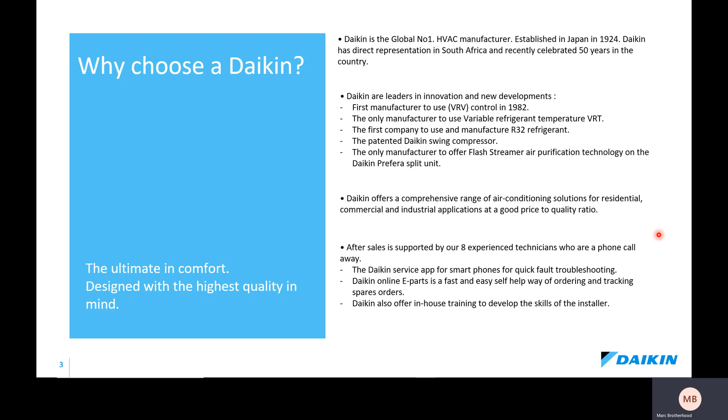Daikin also offers a comprehensive range of air conditioning solutions for residential, commercial, and industrial application at a good price to quality ratio. After sales support is provided by our 8 experienced technicians who are a phone call away. The service app for Daikin is available on smartphones for quick fault finding and troubleshooting, available for Android as well as Apple. Daikin also offers online e-parts as a fast and easy self-help way of ordering and tracking spares and orders. Daikin also offers in-house training to develop the skills of our installers.

Let's take a look at the R32 refrigerant. As mentioned, Daikin was the first company in the world to launch heat pumps and air conditioners equipped with R32 refrigerant. The global warming potential, or GWP, of R32 is only 675, which is only 1/3 of the commonly used R410A refrigerant. R32 is also easy to recover and reuse. So in a nutshell, R32 is a single blended refrigerant, very similar to R22. It's a derivative of R410, which was made of R125 and R32.

So R32 is an ideal refrigerant in the event of any leaks. You can just top up directly. There's no losing of the blends, so you're not going to have either extra R125 or R32 within the solution. So for thermodynamic efficiencies, R32 is a great choice of refrigerant.

675 is the global warming potential of R32. R410 has a global warming potential of around 2088. What that pretty much means is if I lose 1 kilogram of R32, it's equivalent in atmospheric conditions to emitting 675 kilograms of carbon. With R410, losing 1 kilogram of refrigerant out of a system would be equivalent to 2088, or just over 2 tons, of carbon going up into atmospheric conditions. So R32 is 1/3 of the global warming potential in the event of a leak. From an environmental point of view, it is the obvious and prudent choice to make.

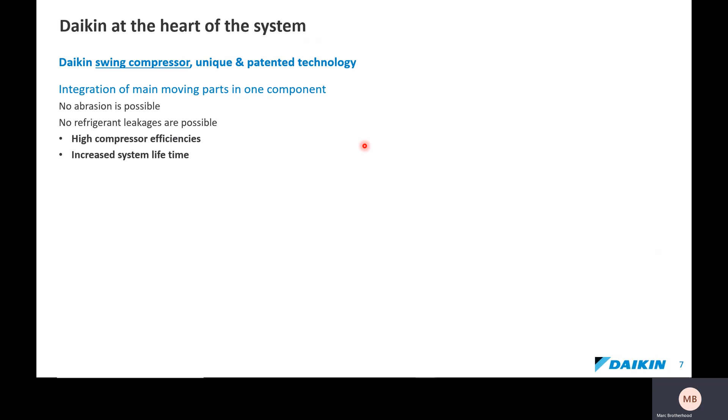What is also unique about a Daikin? If we look at the Daikin patented compressor, at the heart of the system is the Daikin swing compressor. It's unique and has patented technologies. The integration of moving parts is pretty much all in a monocoque design, or in one component, so there's no abrasion possible and also no refrigerant leaks within the compression cycle. Therefore we offer very high compressor efficiencies and an increased lifetime of this compressor. We're the only manufacturer that manufactures this compression device in one single casting.

The good thing with these high compressor efficiencies is you don't get any leakage, because of this monocoque design you won't get any leakage on the high and low side when we do any compression. If we look at the other compressors in the market, these are standard, non-Daikin.

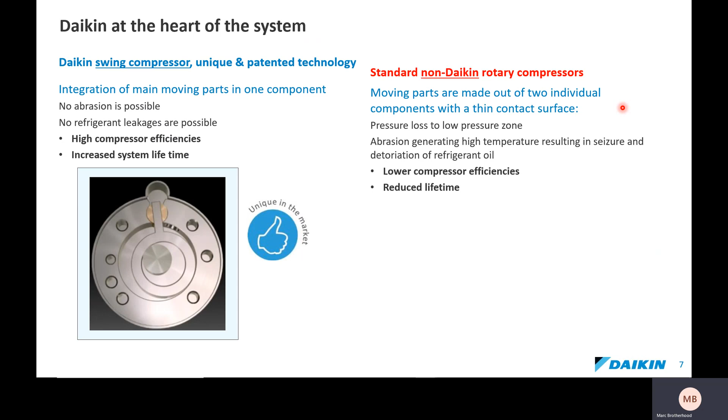These are called rotary compressors. The moving parts are made out of two identical, two individual components with a very thin contact surface. Ultimately you're going to get a lot of pressure loss in the low pressure zone, with high side pressure feeding back into the low pressure side. You're also going to get a lot of abrasion, which is going to generate high temperatures, resulting in possible seizures, deterioration of refrigerant oil and wear metals within the oil.

If you look at the Daikin design, you see this is a solid piece, the same material, whereas here these are two discontinuous pieces of material, and this is where your leakage is going to take place. Within this little geometric triangular design, you're going to get a lot of high pressure gas seeping through under this very small contact surface. There's going to be wear metals because of these two dissimilar metals, and here you can see buildup of wear metals within the compressor. This ultimately ends up in the bearings, mixed with the oil, and acts as a grinding paste, deteriorating your rolling elements within the compressor.

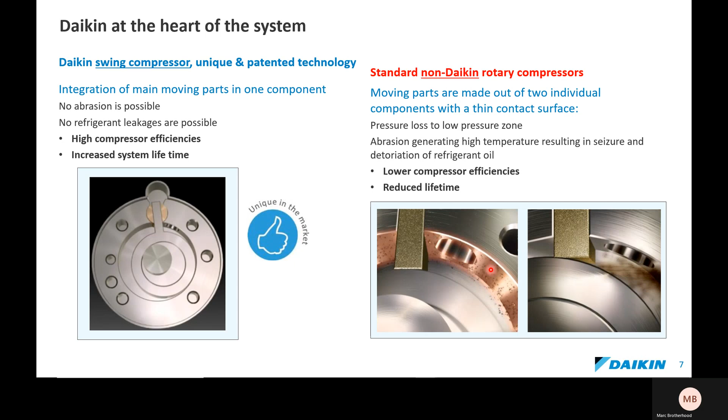Let's look at the Daikin corrosion protection, the Daikin salt spray test on what we call the bluefin treated outdoor unit coils.

We all know that energy efficiency and reliability are key aspects when it comes to choosing an air conditioner. However, the geographic location can be equally an important aspect. Corrosion is a very common cause of failure in air conditioners installed in potentially corrosive outdoor environments.

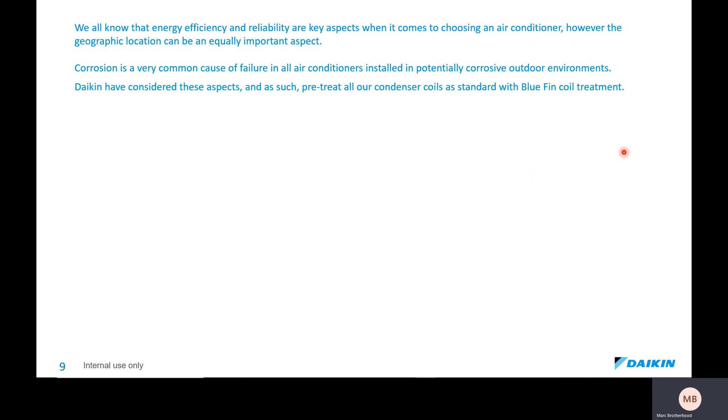Daikin have considered these aspects, and as such, we pre-treat all our condenser coils with what we call a bluefin coil treatment. To test the effectiveness of this treatment, Daikin employed the services of TUV in Singapore to perform very rigorous salt spray testing on our test samples.

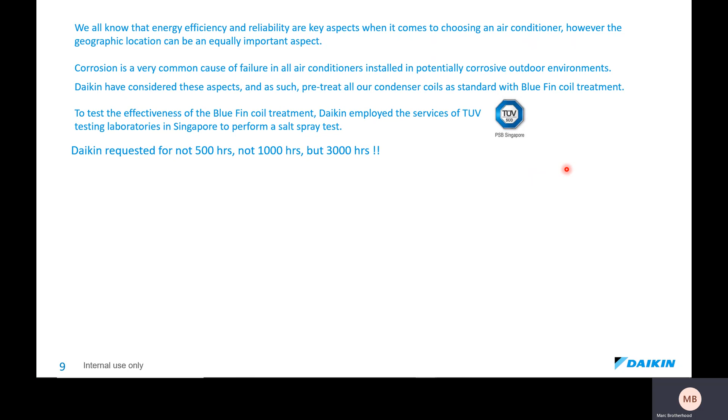Conventionally 500 hours is required, but Daikin requested not 500 nor 1,000, but 3,000 hours of testing in the salt test chamber. Here we can see the exposed period, part of the report from the laboratory, along with the test report number as evidence. And this was the sample of treated coil that Daikin supplied to the laboratory.

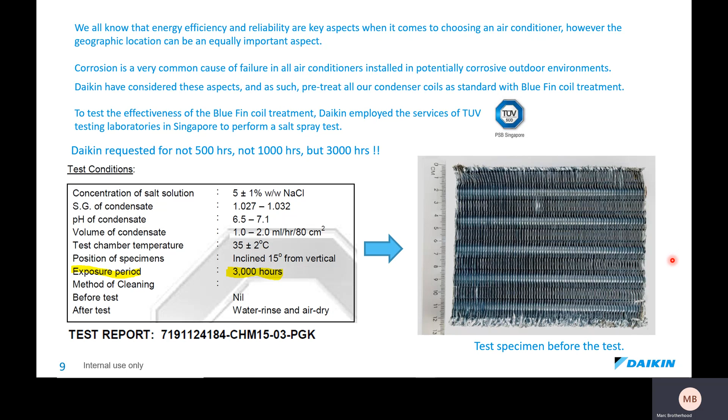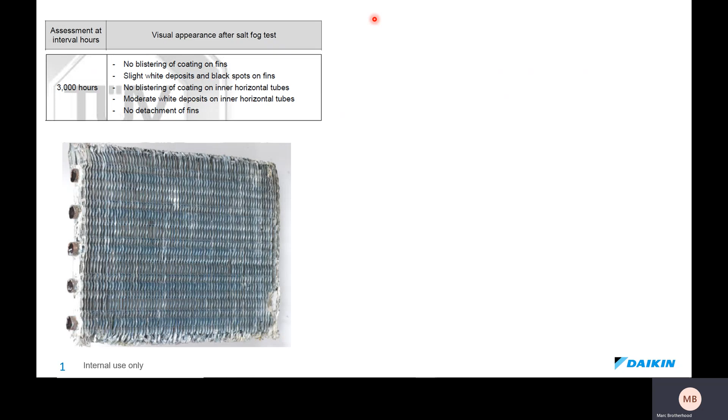If we look at the assessment in the report after 3,000 hours, we'll see there was no blistering of coating on the fins. There was very slight white deposits and black spots on fins. There was no blistering of the coating on any of the horizontal tubes, with moderate white deposits on the inner tubes, and there was no detachment of the fins from the actual tubes.

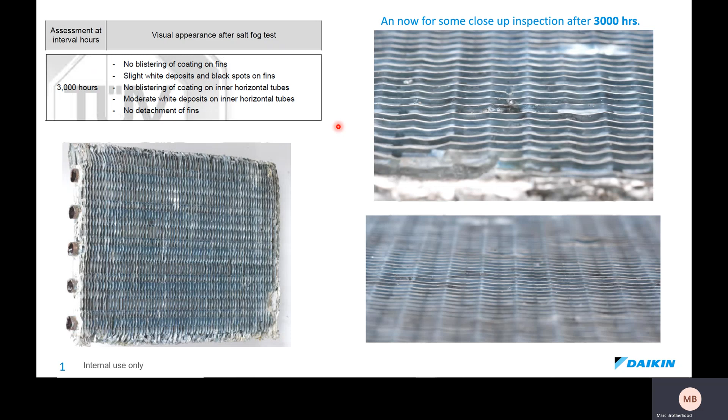That's very important. If you have detachment of the fins from the tubes, there goes your thermodynamic process, and you're going to battle to reach condensing temperatures, which ultimately affects the whole system. High condensing temperatures mean high suction superheats, and ultimately you're not going to achieve your cooling, and you're going to end up seizing your compressors. So there's no delamination of the fins against the tubes.

Next, a very important consideration to make when purchasing an air conditioner is what power surge protection the unit has, especially in South African conditions. Technically there are two enemies of electronic circuit boards.

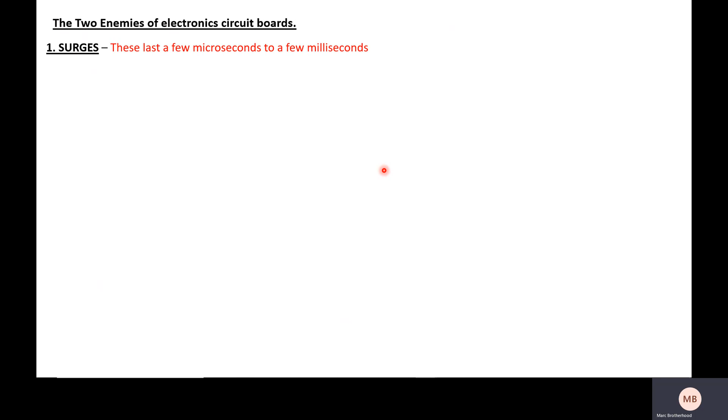The one is surges. These last a few microseconds to a few milliseconds. So what are surges? Surges occur in alternating current power lines as a result of nearby electrical equipment being switched off. For example, you could have a factory with a whole lot of motors, huge induction motors switching off. They will have collapsing magnetic fields, and these magnetic fields have nowhere to go but back into the supply cable, through the transformer, and back into the power grid.

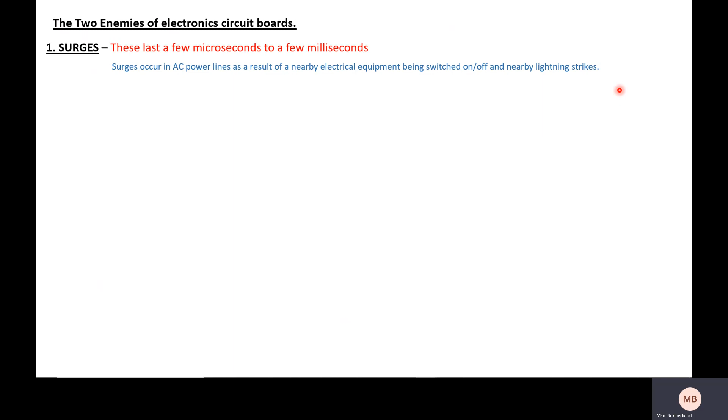And you can also get a surge through nearby lightning strikes. Here we can see a typical cause of transient surges. Here we can see an indirect lightning strike, cloud to cloud discharge.

When you get such a high discharge of static power, around this bolt there are huge invisible magnetic fields. These magnetic fields then enter overhead power lines, as well as any underground power lines. There's a lot of cables that are laid underground, but this magnetic field is permeable. It permeates right through space as well as soil. And what does it do? It generates a transient spark.

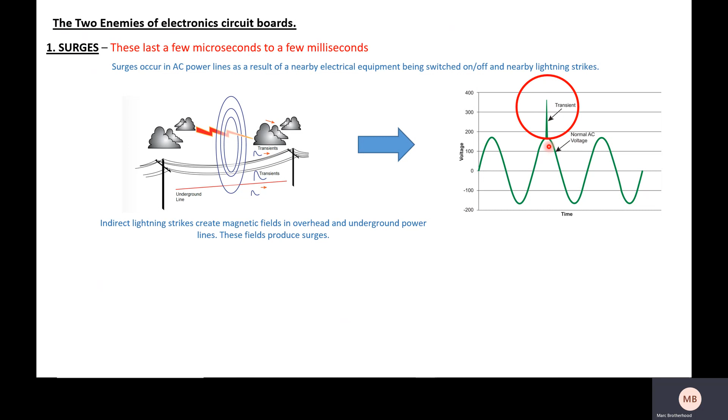This illustrates possibly up to 400 volts on a 230 volt supply, but these can go up into a few thousand volts. This cycle typically oscillates in 1 second. You have up to 50 hertz, so 50 cycles. Typically one of these cycles oscillates at 0.02 seconds, so it's 50ths of a second. And just on one of these sparks, or one of these 50ths of a second, you're going to get a transient spark, which can enter your electronics.

The next enemy of electronic circuit boards is temporary overvoltage. Overvoltage typically lasts for a longer period of time, from seconds to up until a few minutes. Remember, surges are microseconds, which is a millionth of a second, to thousandth of a second. Overvoltage can run from seconds to even minutes.

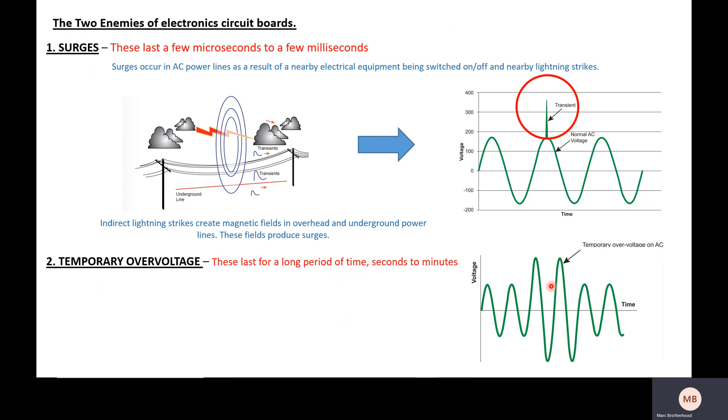Here we can typically see what an overvoltage is. It's a swell in the supply voltage. It's not as instantaneous as a transient spark.

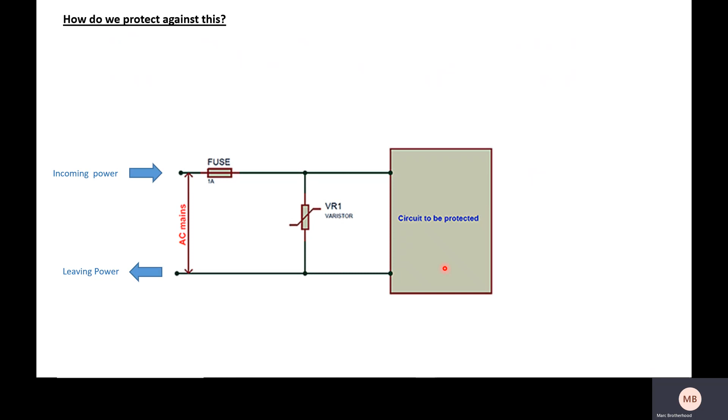So how does Daikin protect against this? Here we can see a typical circuit board on an air conditioning unit. We have the incoming power. It enters through the cable, does useful work through the electronics, and the frequency returns back to the transformer in the road.

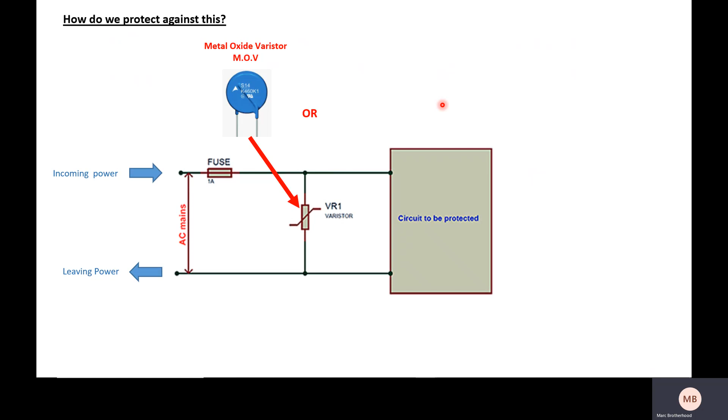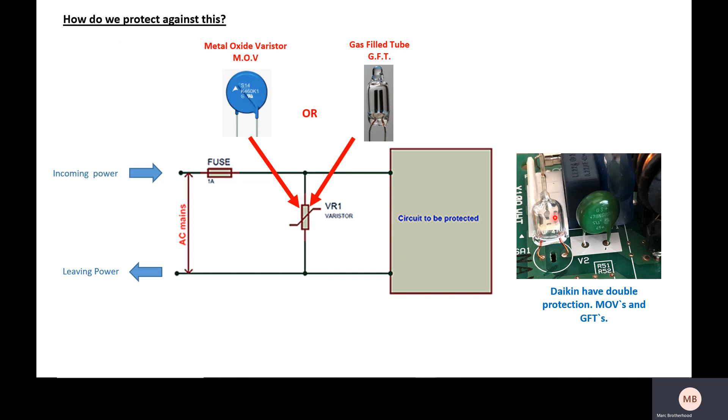So, all good and well, but to the layman, how does a metal oxide varistor work? We go back to our circuit, and here you would see the metal oxide varistor in circuit.

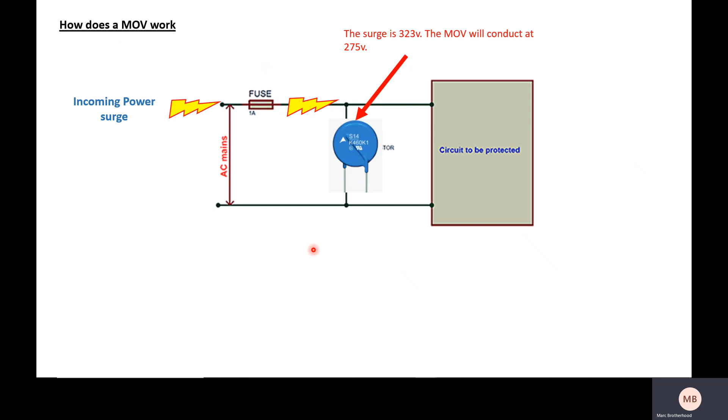Now we would have an incoming power surge. It would enter, it would go through our fuse. It wouldn't last long enough to blow the fuse because it happens so quick. But let's say the surge is at, say, 323 volts, or if we look at this specific component, it can handle up to 460 volts.

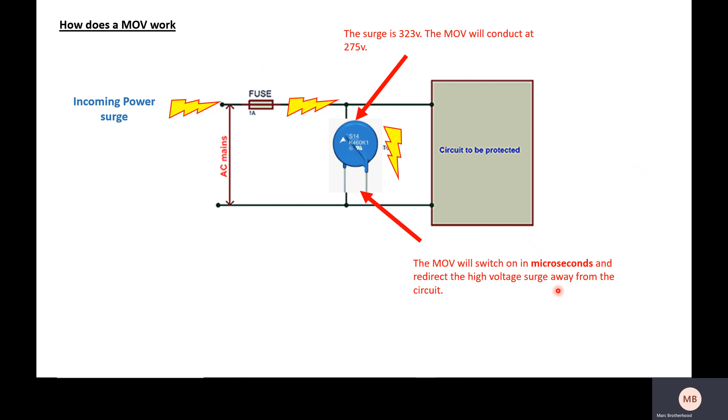When you reach these high voltages, the MOV will pretty much start conducting anything over 275 volts. It'll immediately switch on in microseconds, and it's going to redirect the high voltage surge away from the circuit, and send that energy back into the AC power lines where it came from. Therefore, it's going to go through this fast acting device and back into the grid where it's come from. And none of the energy is going to be transferred.

And these, believe it or not, these things work regularly every day, all day. You just don't even know that they're working. With time, if you eventually open these up, you will see they'll be slightly discolored, like a brownie tinge to them, and some of them might develop cracks on the surface. That is because they've been working all along in the circuit without you even knowing it.

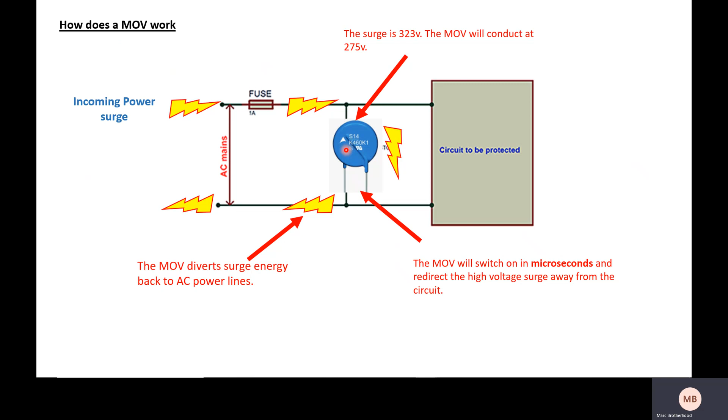The reason they go brown and discolor and split is because of the heat. There's different spikes that continually come in during the day, and these things get hotter and hotter, and with time, with thermodynamic stressing, they all split and crack.

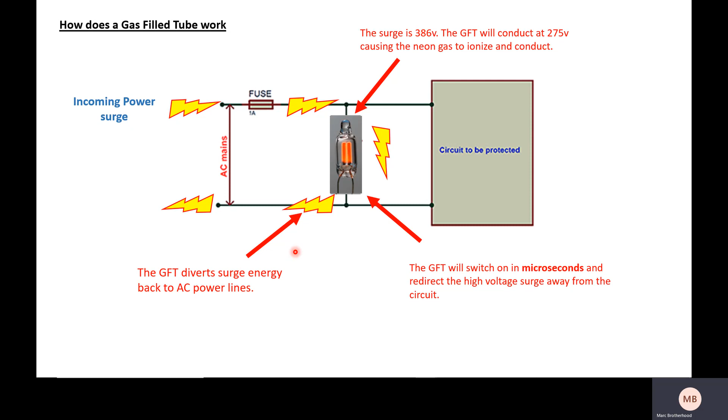The neon inside will become electrically conductive, like you would see in your neon signs. And bang, the gas-filled tube within microseconds is going to redirect the high voltage surge away and send it back to the Eskom power lines.

So now that we know that the units pretty much all come with unique Daikin patented swing compressors, all our units come with Daikin bluefin coil treatment for corrosion. And thirdly, the units all have double surge and overvoltage protection in the form of metal oxide varistors and gas-filled tubes. Let's look a bit more specifically at our product ranges.

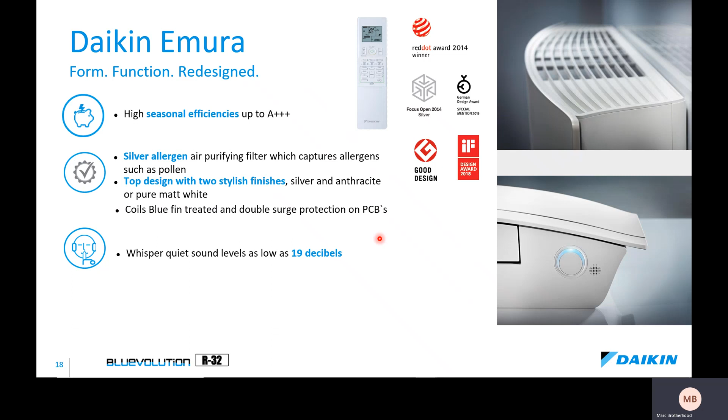The coils are bluefin treated and, as mentioned, will come with double surge protection on the circuit boards. It's whisper quiet down to 19 decibels. So just for you to picture how much is 19 decibels, if you just lean over and whisper very, very quietly in somebody's ear, that registers as around 30 decibels. So this is way, way quieter than even whispering quietly in somebody's ear. The unit also has online controller capability, which you can operate through your smartphone by downloading the application from the Daikin website or your app store.

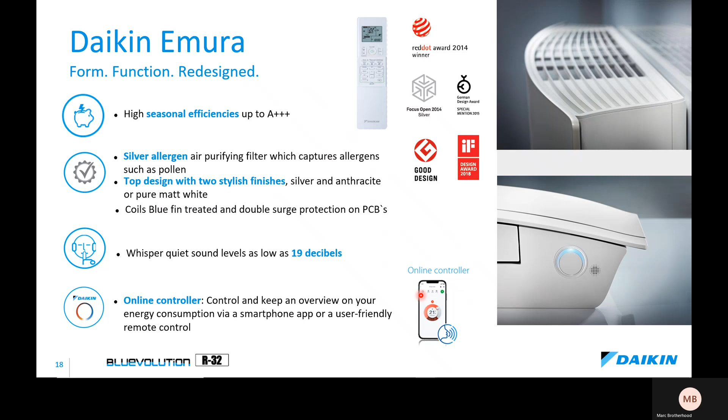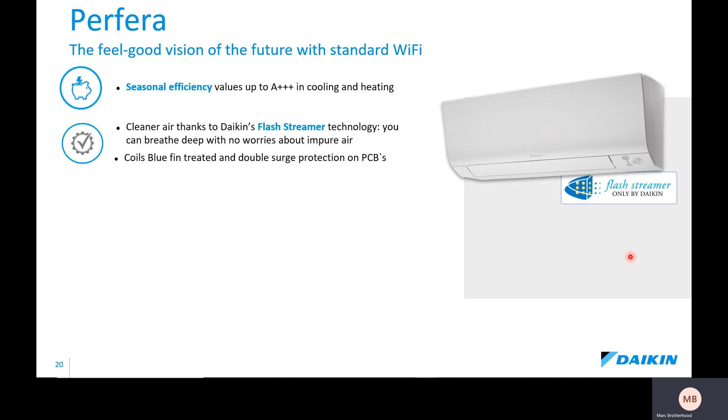The next model we offer is the Perfera. So very good seasonal efficiencies, up to A+++ in heating as well as cooling mode. Very unique, this is cleaner air thanks to Daikin's flash streamer technology. You can breathe deep with no worries now about impure air. This is the only unit on the market that uses flash streamer technology. Also, bluefin coated coils, double surge protection on the circuit boards.

This unit also comes with a 3D airflow, which are these sensors here. The one is a 2-area motion detector sensor. So if airflow would be sent to another zone within the area, so you don't get drafts on you. And the other one is an energy saving mode. It uses infrared technology. If it senses there's no human presence, it will default to an energy efficient setting.

The scroll compressor will drop right down to minimum rotational speed. When you walk back in the room, the infrared sensor will detect your body and go back to your default setting of whatever your settings were prior to it going into energy efficiency mode.

Also practically inaudible, so ideal for bedrooms, nighttime, where sleeping and noise sensitivity matters to certain people. Very, very quiet, virtually whisper quiet. And this unit will also offer the online controller.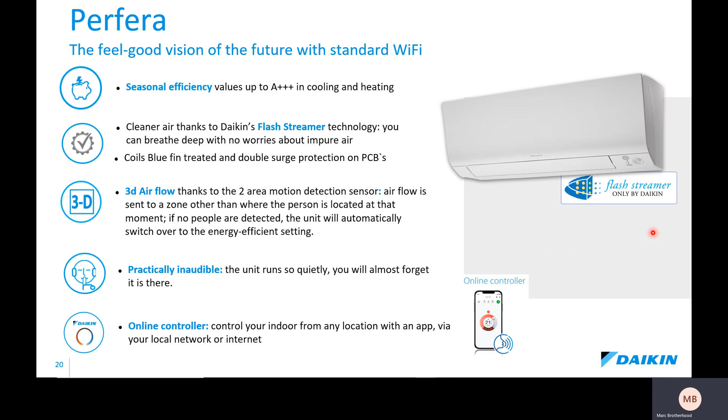So let's have a closer look at the flash streamer. How does it work? It generates high-speed electrons. This streamer has a high potential difference, which accelerates and puts a lot of kinetic energy into electrons. These are ionizing electrons, and they eventually collide and activate any molecules that are going across

the filter and across the coil. And what it does, it powerfully decomposes any dust mites, pollen particles, mold, viruses, with the kinetic energy carried within the electrons. If you open the cover of the unit, these are the 2 titanium apatite and silver allergen filters, and the flash streamer is actually housed in this white box.

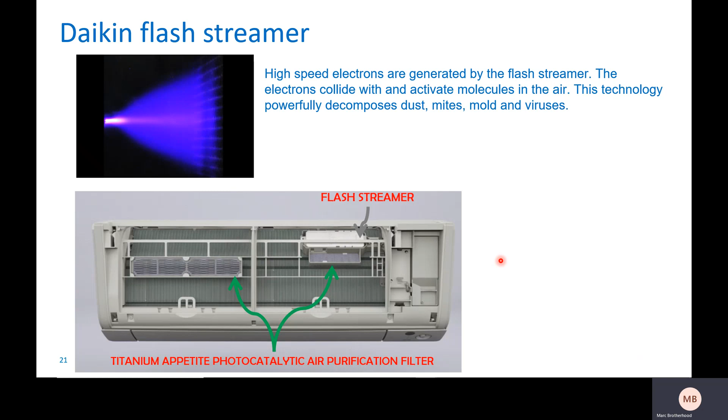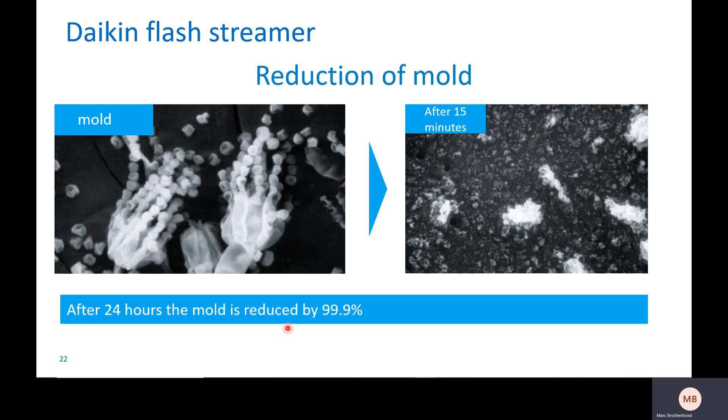Look at what this flash streamer does. Typical mold that would come across the coil. After 15 minutes, the high-speed electrons detonate the molecular structure of mold. And after 24 hours in a closed room environment, you can reduce the mold by almost 100%.

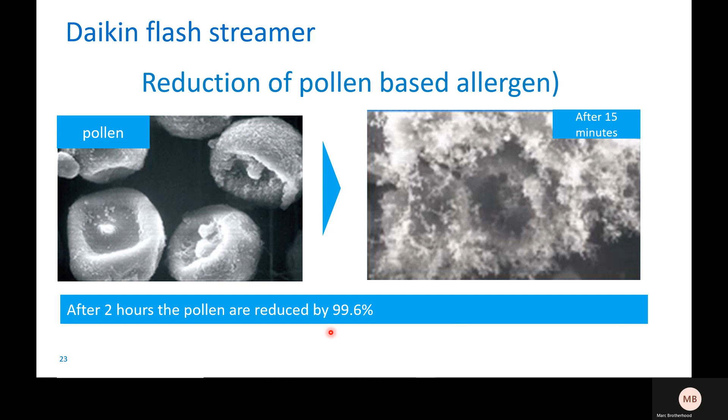Pollen - people that are allergic and have reactions, especially around springtime, typical pollen molecules in the air creating sinus allergies. After 15 minutes, the pollen particles are totally disintegrated. In a closed room, after only 2 hours we've virtually eliminated all pollen in a typical room, so it's much quicker than the mold virus. Within 2 hours, your allergens should clear up.

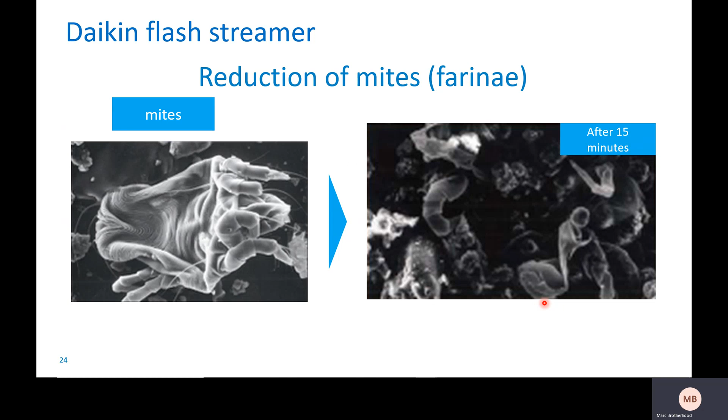And dust mites, notorious - they live on your skin, they live on any forms of dust, they float through the air, they're much less buoyant than air. After 15 minutes of being hit with high-speed electrons, you can see that their bodies are totally disintegrated.

The third product on our room air conditioning range is the Daikin Sensira. This unit comes with a Daikin online controller app, and you can also have voice command via Amazon Alexa or Google Assistant. With this, though, you would require this Wi-Fi interface adapter as an optional extra. There's a cavity within this unit, and the Wi-Fi adapter will slide into this cavity and will give you Wi-Fi and voice - just by talking to your mobile phone, you can control this air conditioner.

Not as energy efficient as the Emura and the Perfera, but also very good value return. In return, A double plus in cooling mode of energy efficiency.

We offer long pipe runs too, 20 meters on the 9,000 and 12,000 BTUs, with a height difference of 12 meters - so you can typically go around 4 stories. With these units, there's enough energy in the compressors to carry back any oil. And in our 50 and 60, or 5 and 6 kilowatt class, we can go 30 meters and up to 20 meter height difference, which is about 6 stories with these units.

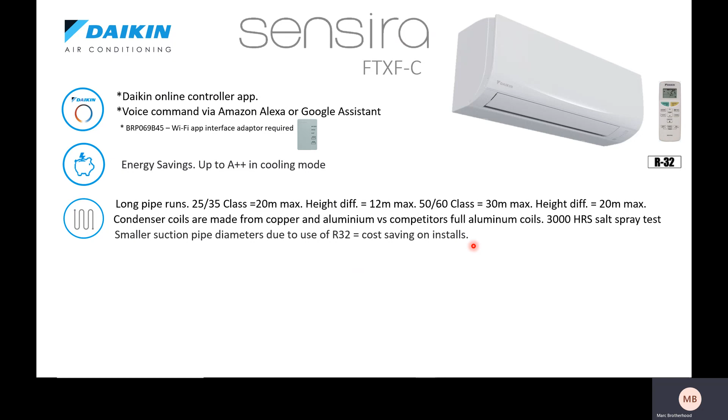PCB protection as well, also has the metal oxide as well as gas-filled tubes. And it has the new swing compressor, which is very good in reducing any breakdowns because of the longevity of the monocoque design of the swinging mechanism.

These units also go down on the 9,000 to 21 dBs, and as mentioned, the whisper is around 30 dBs, so practically inaudible in cooling mode when you're trying to have a quiet night's sleep.

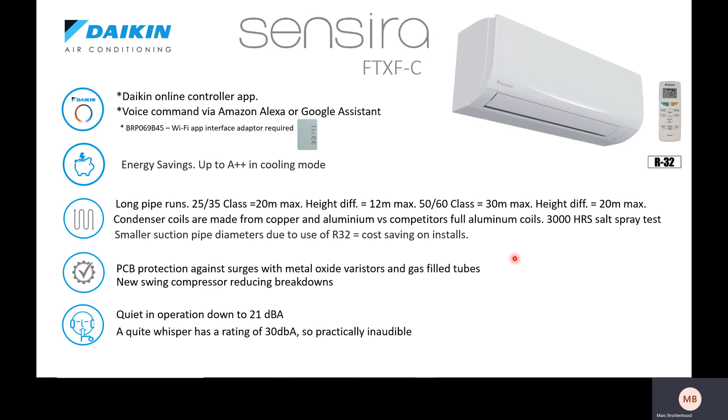We've done a running comparison of the units, the Sensira, the Perfera, and the Emura. If we take, for example, electricity charged at R1.88, and use a seasonal energy efficiency value taken over a seasonal year, here we can see the operating costs of running one of these. This would be a 12,000 BTU unit, they're all 3.5 kilowatts, and it will cost you around R1 an hour.

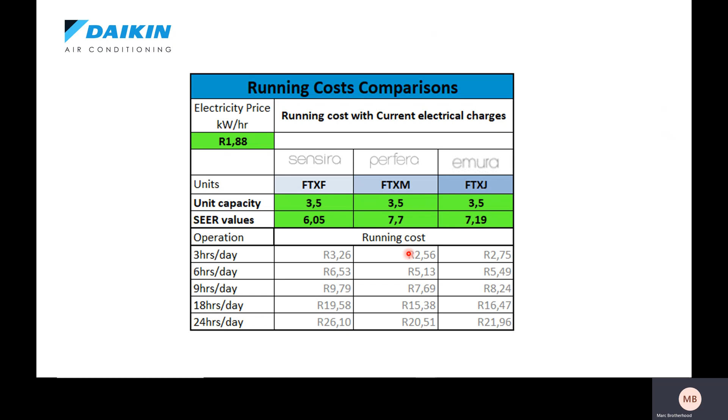The Perfera being in the middle, around R2.56 running for 3 hours. So they're very energy efficient to run, these units.

That concludes the operations, or the introduction to our room air conditioning range. We now go on to our more commercial and light commercial ranges, which we call the Sky Air range.

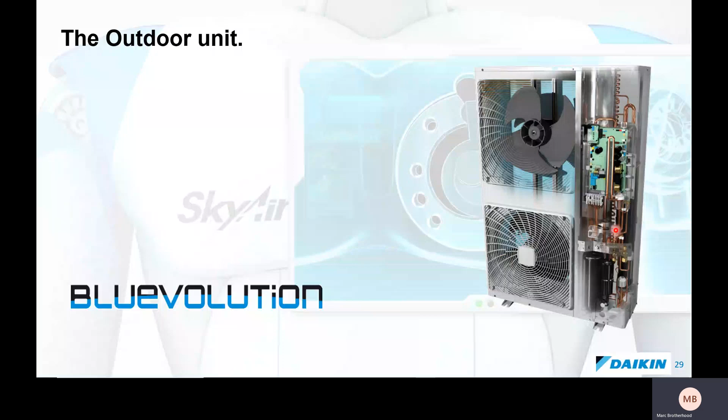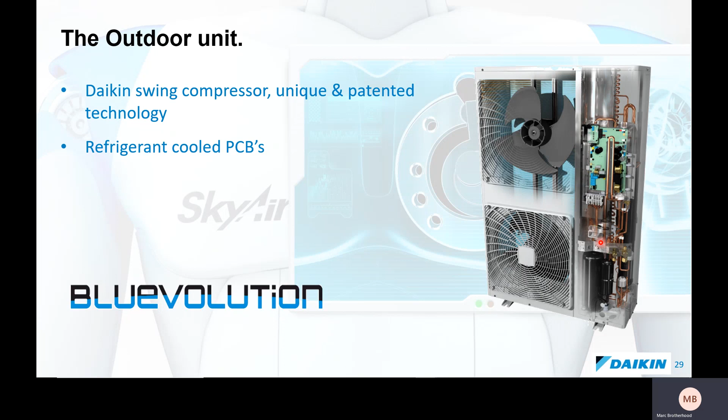Right, let's take a look at the Daikin outdoor units on our Sky Air ranges. They come with a Daikin swing compressor, which is unique and patented technology specific to Daikin. Very unique to our product is refrigerant-cooled circuit boards, double surge protection, and all come charged with R32 refrigerant.

If you look at this unit, we've taken the covers off for you. Here you can see on the circuit board is a refrigerant pipe. This refrigerant pipe is bolted onto an aluminium heatsink.

In the event of load shedding, in the past, normal aircon units out in the field require forced draft induction, so these fans need to spin even when the refrigeration circuit is off. The reason these fans need to spin is to draw air over the power electronics and keep them cooled. If you have load shedding, these fans just stop automatically and you get a big buildup of thermal energy with nowhere to go. You ultimately dry out the heat conducting paste on your IGBT modules, and the heat conducting paste eventually goes hard and brittle, and you end up with component failure.

Now, with load shedding, even if these fans stop, there is still refrigerant under high pressure in this pipe, and due to natural conduction processes, the heat will come through. Generally, these components can be up to 80 degrees. This subcooled liquid in here is sitting at around 45 degrees. So you're still going to get around a 40-degree difference on these electronic components.

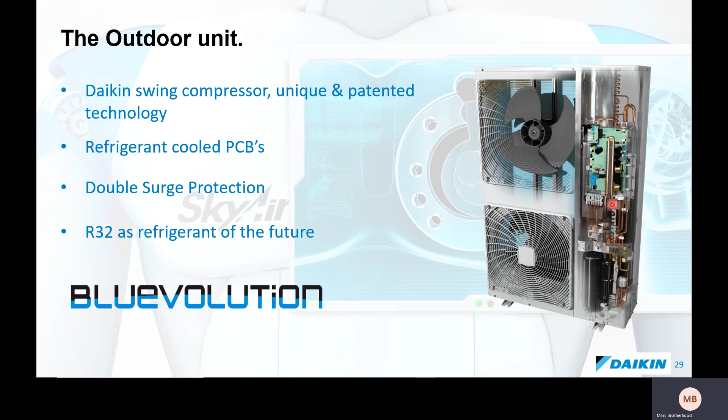They're going to pretty much just cause this refrigerant to boil within the pipes. As it boils, expanding gases cool, and the expansion is going to go into your field pipe work, therefore keeping your electronics nice and cool, regardless of whether these fans are cooling or not. So it's very good longevity that Daikin have introduced to keep our electronic components cool and operable within around the 80 to 85 degree operational range that they can get to.

Well, first of all, very good energy savings, up to A++ in cooling mode. We offer the optional motion sensors, which can further save up to 27% on energy bills. Here we can see the presence sensor and the floor sensor, where they make judgments, and it will go into standby mode if it doesn't sense you through that sensor, and the floor sensor pretty much removes any drafts from blowing on you.

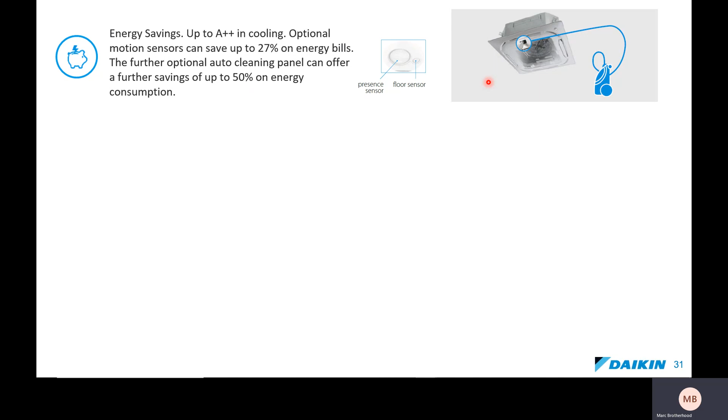We also offer a further 50% saving on energy consumption with the auto cleaning panel, and here you can see all you do is plug in your vacuum cleaner into a little dust box. A little light will come on your remote control telling you the dust box is full, and all you do is plug in this vacuum cleaner and empty the dust box.

There are two series that we offer: one is called the Daikin Advanced series, and the other is the Active series. There is a price difference between the two, but if we look at the pipe runs on the 35 class, it's 20 meters, and we can do a vertical distance of 15. Pretty much we can go up to 50 meters on the Advanced series, a 30 meter difference.

If you want a slightly more budget option, which comes with the same technologies on the outdoor unit - so with the Sky Active only the outdoor unit changes - we offer this in the 7.1 up to 14 kilowatt range. You can go up to 30 meters, so a slightly reduced pipe run, and it's purely got to do with the investment in the power electronics, which drive the compressor up to about 30% boost function to help overcome that extra 20 meters.

Also, condenser coils are made from copper and aluminium. They are not made from fully aluminium microchannel, so you can be sure the structural rigidity and environmental resistance is going to allow the unit to last for many years.

Quiet in operation, these round flow cassettes go down to 27 dBs on the 3.5 kilowatts, and as you've seen, quite repetitive - just always remember that a whisper is around 30 dBs.

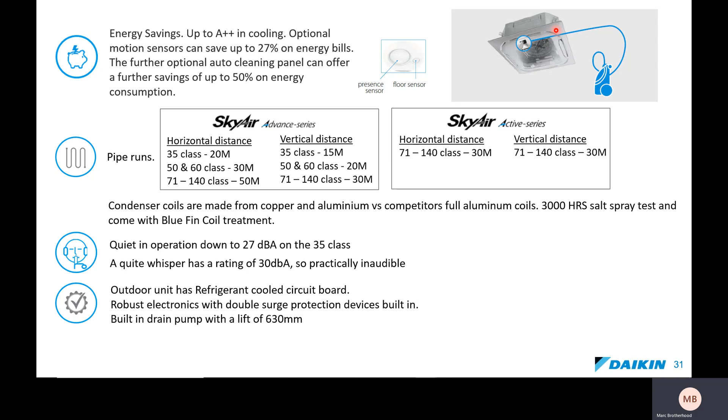Outdoor units, refrigerant cooled PC boards, robust electronics, and we have built-in drain pumps with a lift of just over 0.5 meter. So there's a nice head pressure available on these pumps to remove any condense.

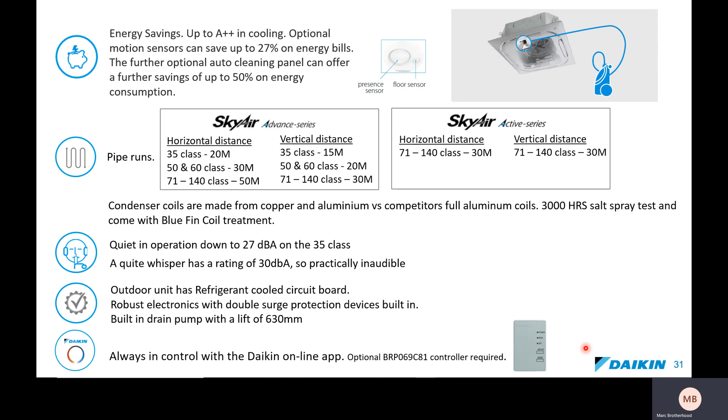And you can also have the Daikin online controller app, but you would need the optional BRP adapter for Wi-Fi.

We also offer the widest range of decoration panels to fit most interiors.

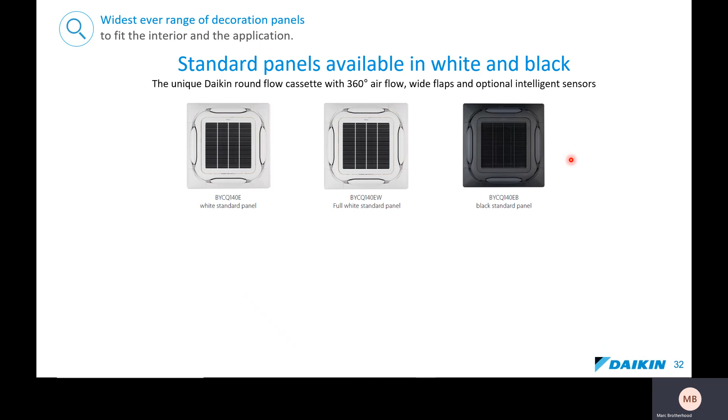We have the standard white panel. We have what we call the fully white - this would include white felt, whereas this one would come with a gray felt. This would be fully white, so you would see white and white felt on the insides. And then we have the black standard panel. We can also offer you designer panels - they're a bit more avant-garde with a reduction in these return air grills, so it just looks more fashionable. These are the 5 different options that are available on the cassettes.

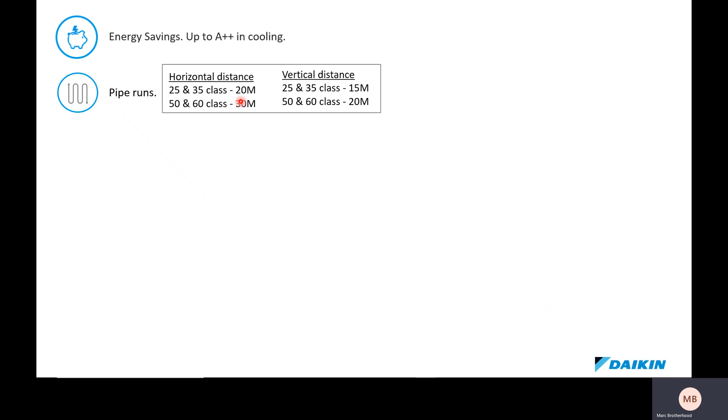If we now go on to the fully flat cassette, it also offers energy savings up to A++ in cooling, with impressive pipe runs of 20 meters for the 2.5 and 3.5 kilowatt range, and 30 meters for the 5 and 6 kilowatt range. It's almost fully flat, leaving only a little 8 millimeter border which is virtually flat with the ceiling and hardly noticeable.

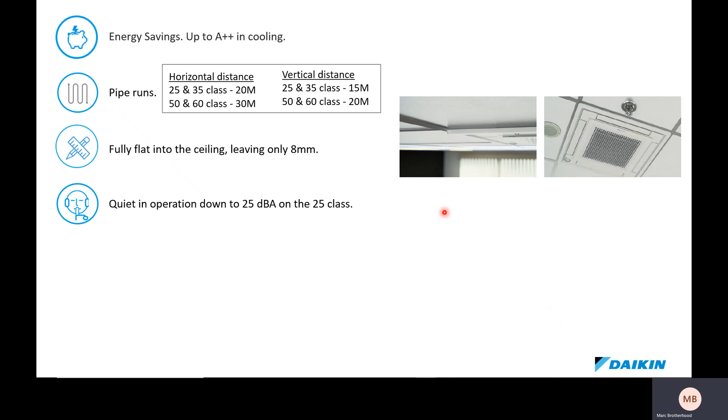Very quiet in operation, down to 25 dBs on the 2.5 kilowatt range. Robust electronics, and these units also come with built-in drain pumps which can pump up to just over 0.5 meter, 630 mils. We also offer the 2 intelligent sensors I've mentioned, the presence sensor and the floor distance sensor.

And these also come with individual flap controls. So on the remote, I can disable, say, this flap if it's causing a draft on somebody, and without having to rearrange the whole ceiling configuration, we can just disable a flap without altering any air movement.

And they also come with an optional fresh air intake of about 20% fresh air, very useful in office environments. Fresh air 20% to dilute any carbon dioxide buildup, which here by around 2 in the afternoon can be quite a problem as the blood levels start filling with carbon dioxide.

An optional extra, which is also available for the Daikin online app. Right, we can look now at the Daikin ducted range, which also have the option of auto cleaning filters.

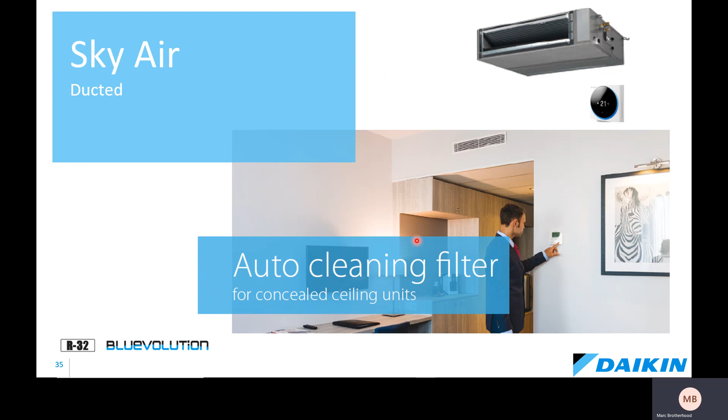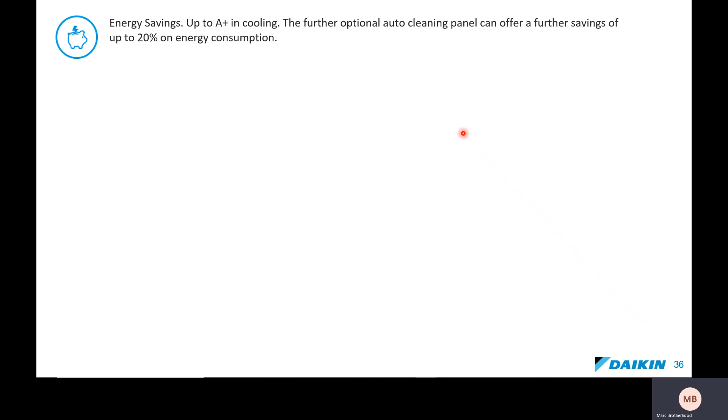Very energy efficient units, ideal for little hotel room applications. Up to A+ in cooling, and a further optional auto cleaning panel can offer a further saving of up to 20% on this particular unit, up to 50% on the cassettes, and up to 20% energy saving on these ducted units. We offer them from 3.5 up to 14 kilowatts.

They can run up to 50 meter pipe runs, and we offer more on the 7.1 to 14 kilowatts. With Sky Active, we just derate the unit slightly and you are still getting up to 30 meter horizontal, but impressively 30 meter vertical pipe runs.

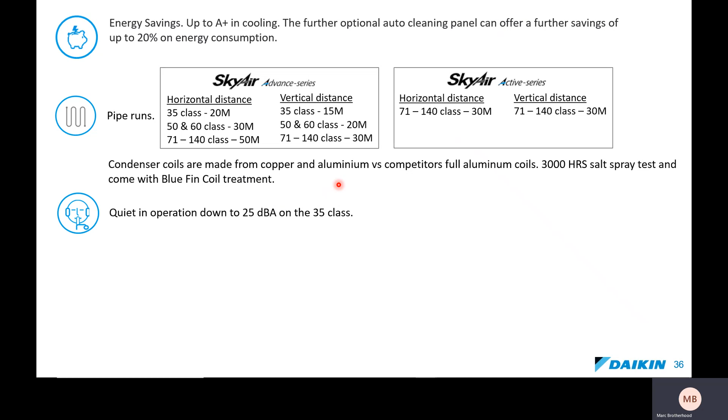Also the outdoor units are consistent across the range, so they will also come in copper and aluminium for structural rigidity and have also been subjected to the 3000 hour salt spray test. Quite impressive, 25 dBs on a ducted unit on the 3.5 kilowatt range.

Outdoor units, for peace of mind, are refrigerant cooled, so the power electronics have a very low possibility of overheating. Double surge protection. This is also the slimmest unit in its class.

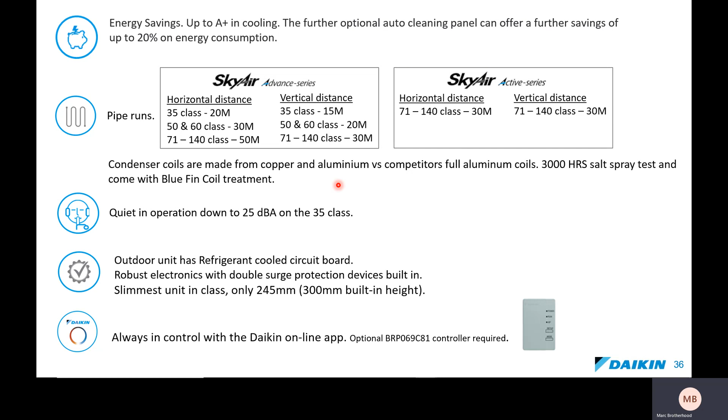It's only 24.5 centimeters high. Overall, you need 30 centimeters for your built-in height, but that is ideal for any retrofits where there's existing bulkheads and you are limited for ceilings. This is the unit to go for because it's only 245 millimeters overall, and it also offers the Daikin Always in Control online app.

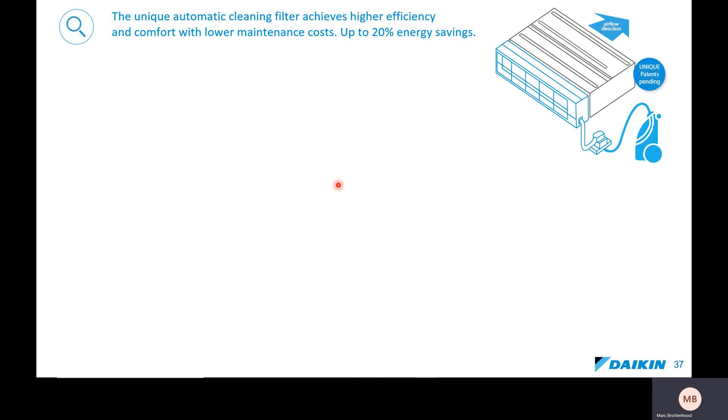And here we can see the unique auto cleaning filter, which can give up to 20% energy savings. It clips in, has a brush that drives across on electromechanical tracks, and also has a dust box which you can remotely mount in the ceiling. It's a 2-inch by 4-inch box.

This is also very good for hotel rooms, to avoid marks on the ceilings from people always coming in and servicing. It really reduces servicing costs because it's all automated and the dust box fills, with very low maintenance. You need very little downtime in the rooms because you're not going to be opening ceiling panels, you're just going to quickly put a vacuum cleaner in and empty the dust box.

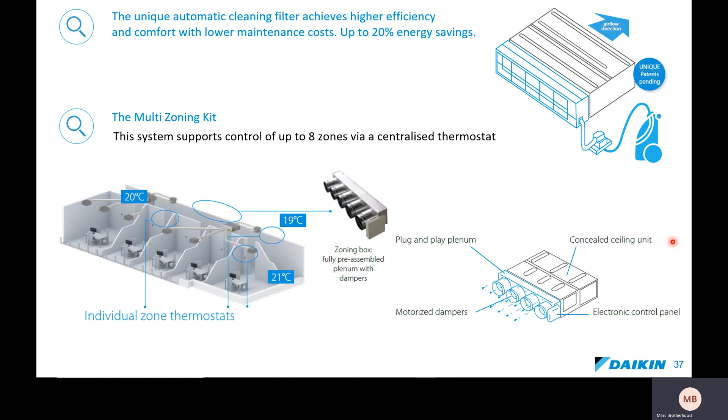And here we can pretty much see something very similar. You can't have the auto cleaning panel as well as the climate zone, but here you can see these are motorized dampers with an electronic control panel to individually control these supply air dampers.

And here you can see pretty much a layout of the supply air, along with some nice fashionable thermostats, which come in a virtually piano white finish.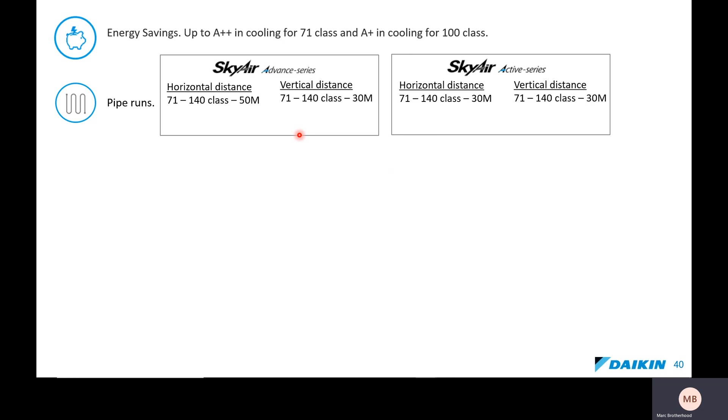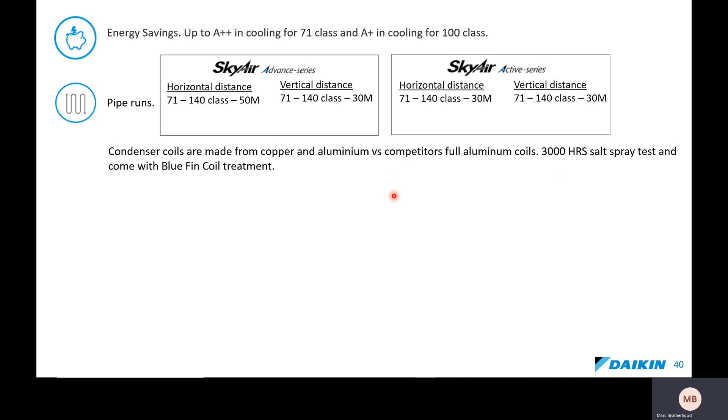Also made from copper and aluminium outdoor coils, and also subject to the 3,000 hour salt spray test, the Daikin bluefin coil. The optional online app is available, you need one adapter per unit.

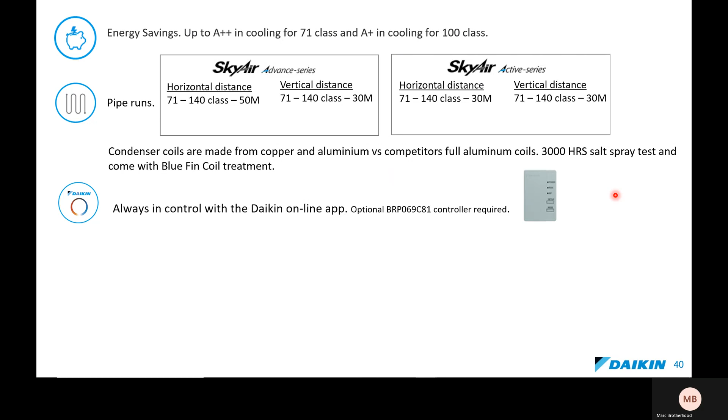Ideal solution for small businesses and shops, even for server room operations, because they are designed for long all-day hours of operation. So it's a very powerful machine, more commercialized for those long 8 to 10 hour days, or even for server rooms where they're designed to run on 12 hour or even 24 hour schedules.

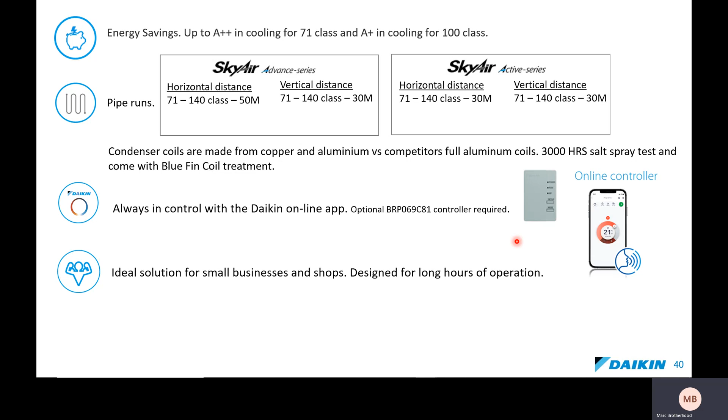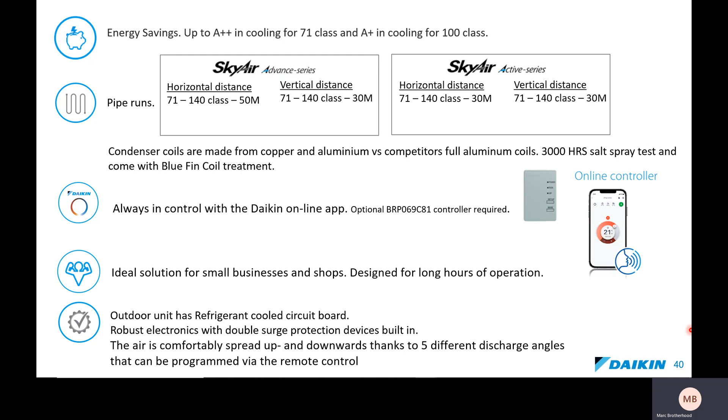Also, outdoor units have a refrigerant cooled circuit board, robust electronics, and especially on this specific unit you have server cabinets. You have 5 different discharge angles that can be programmed via the remote. So there's nice supply air with different angles, which can destratify the air and really help getting into those awkward cabinets that require cooling to go up through the electronics.

Right, then we have our Sky Air, the under ceiling units.

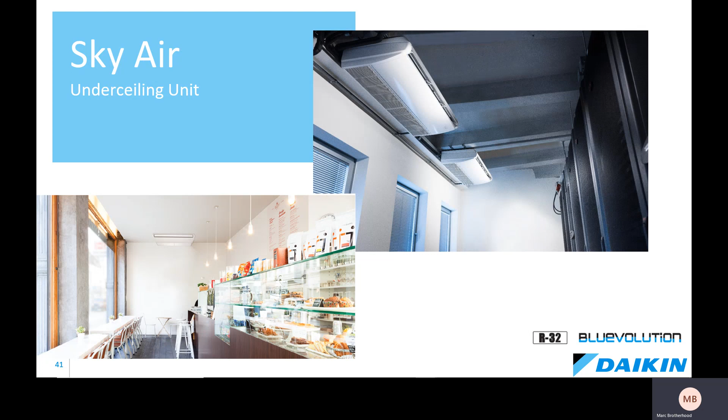These are ideally suited for wide rooms where there are no false ceilings. Perfect solutions, we can go up to 3.8 meters from floor to ceiling height. Also, very unique about this is that they can virtually be mounted in the corner. We only need 30 millimeters, which is 3 centimeters, a little gap between this panel and the wall, just for lateral space for serviceability, so we can get this panel off. So 3 centimeters is virtually nothing. They can fit nicely into the corner of any structure.

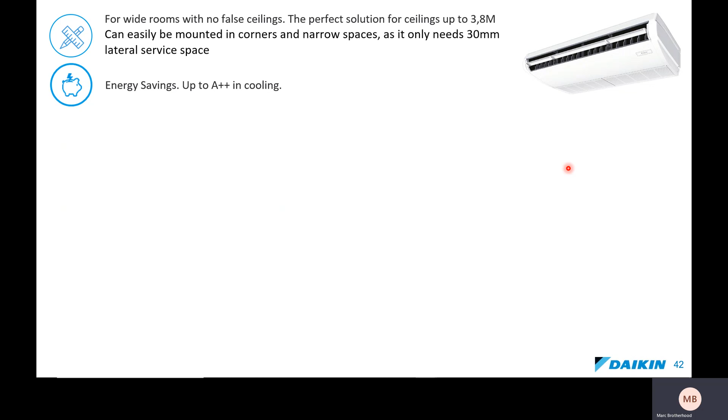Very good energy saving as well, nice and efficient to operate. A double plus in cooling mode. Once again, the Sky Air Advance and Active options on the outdoor units.

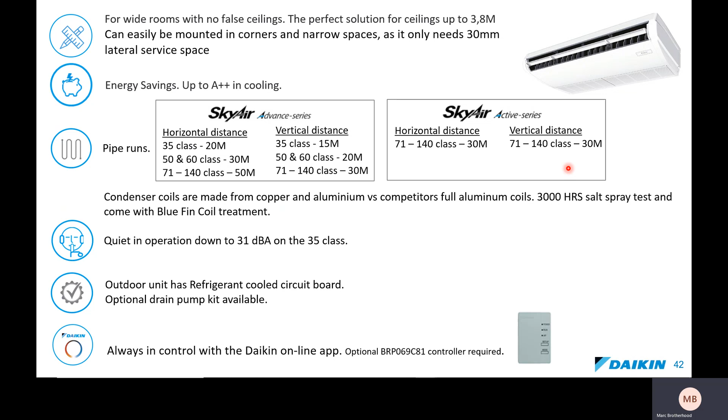For the size of this unit, very impressive, down to 31 dBs for the 3.5 kilowatts. And the outdoor unit as well comes with refrigerant cooled circuit boards for the power electronics. On this one though, there is no inbuilt drain pump, but we can offer an optional drain pump kit if you don't want to use the gravity feed. And once again, the Daikin online app with the adapter is available, but you'd need to get the adapter.

Right, we now move on to our concealed unit with a high ESP. This unit came out a few years ago. And these units have very good external static pressures of up to 250 pascals, so they're ideal for large sized spaces.

It has what we call a unified R32 and 410 indoor unit. So what does that mean? The new indoors are backward compatible with the existing R410A system. So if you have an existing system you want to upgrade, with the R32 indoor unit, you just change the indoor.

The big advantage with this new product is that the fan speeds are now adjustable on the remote. The 410 units never came with adjustable fan speed, they were fixed fan speeds. They were workhorses to overcome ducts. These are a lot more user-friendly, and you can adjust the fan speeds on the remote control.

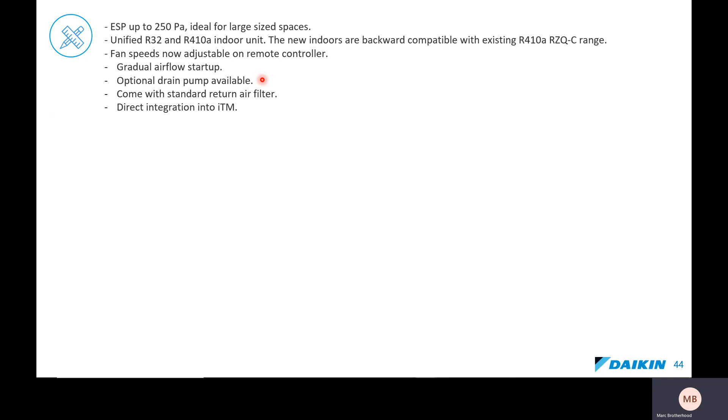So the advantage with these new units is gradual airflow at startup. There's optional drain pump availability. It comes with a standard return air filter, and it can directly integrate into our iTouch manager with the F1, F2. There's an impressive seasonal energy efficiency ratio, 6.26 for the 20 kilowatt unit and 5.28 SEER for the 25 kilowatt units.

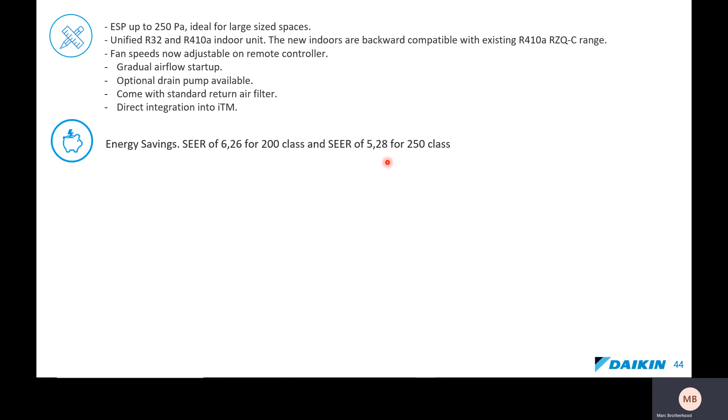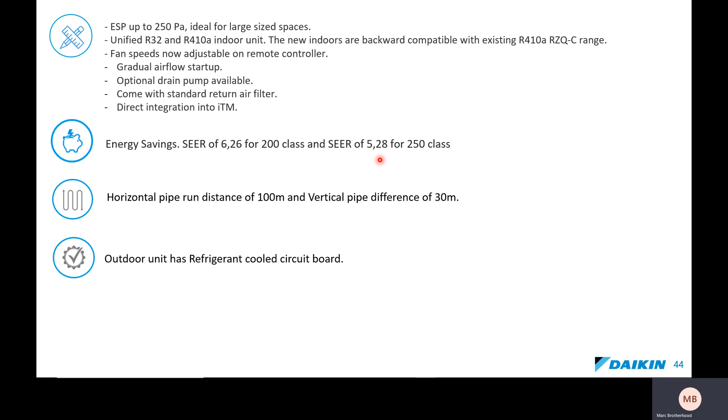Impressively, these units can have a horizontal pipe run of 100 meters and a vertical pipe run of 10 stories, pretty much your 30 meters taking an orthodox 3 meter ceiling height. Also, for peace of mind, the outdoor units - not on the 410, no, but on the R32 - have a refrigerant cooled circuit board. And we also offer the protocol of the Daikin online app.

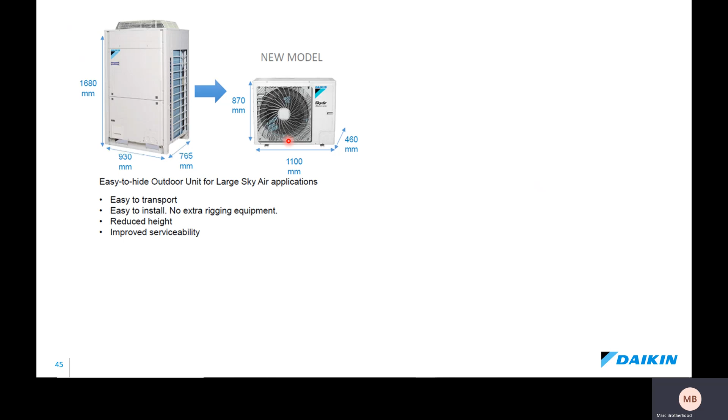And the good thing is this is front discharge, whereas this was a top discharge. So if this was going into, say, a parking bay with a concrete slab, you'd have a lot of short cycling of hot condenser air, which would elevate head pressures. You don't have that problem on this unit, and it's much easier to service. Here we can see typically we're showing you the top discharge versus the front discharge units.

And that pretty much concludes the presentation on the Sky Air and RA units. Thank you for your attendance.